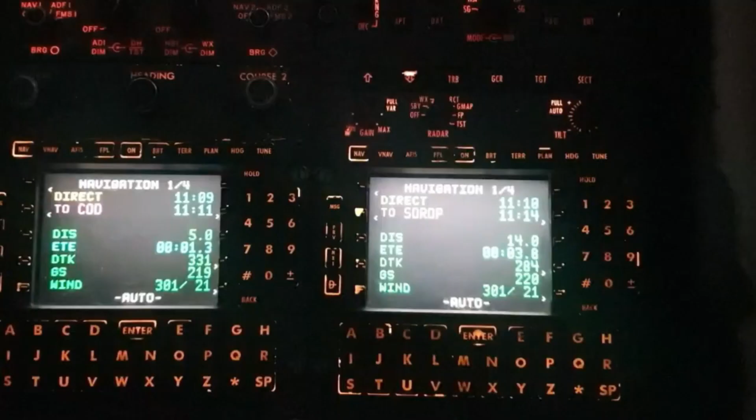But why is the flight technical error the thing that worries me the least? Because the flight technical error, by definition, is something which is always seen by the pilot. You can see the flight technical error in front of you on your navigation display. Just look at the navigation display, just look at your HSI, and you will see that the aircraft is not on the magenta line — the HSI is not centered. If you're on an Airbus, your aircraft is not on the green line. That is the flight technical error: your aircraft not being on the designed path.

Now, the maximum flight technical error which is allowable is half of the RNP, because the remaining half of the RNP is, let's say, dedicated to the technical system itself, and not to the human error of flying the aircraft. But that's perfectly logical, because if you think about a VOR, what we do is allow a maximum of 5 degrees deviation, which is half scale of the HSI. And if we allow half of the RNP, we're actually allowing half scale of the HSI. So what we're doing with the flight technical error is totally reasonable.

Because this flight technical error maximum allowable is 0.5, I want to take advantage straight away: for this reason, it is prohibited to fly direct to the final approach fix on an RNP approach. The reason this is prohibited is because when you reach this point, the final approach fix, the aircraft will be turning.

And then you will find yourself on the final, with an RNP of 0.3 and the maximum deviation of half of the RNP, you could, with the turn, find yourself outside the maximum certified area. So for this reason, they want the flight to be aligned with the final segment before passing the final approach fix, and that's why on an RNP approach you cannot take a direct to the final approach fix.

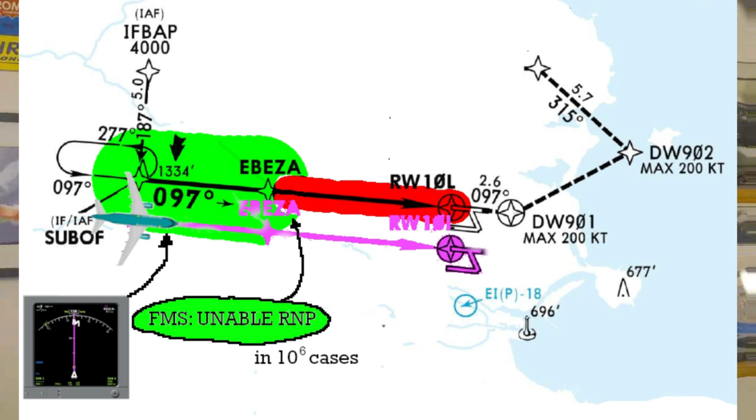As we said in the previous video, there is still a remaining chance that your position is actually farther out, outside the required navigation performance, and the system will not advise you. There is also a statistical possibility of your aircraft not being on the required route and the system advising you. That is a bit more likely, I would say, but this doesn't cause a major problem, because then the pilot is advised and will take a corrective action.

To better understand the navigation system error, let's analyze this example where a pilot is requested to intercept course 285 from Dublin. The course is set and VOR LOC is armed, the aircraft is intercepting with VOR LOC. At this stage, the pilot monitoring sets in the FMS the direct to Dublin course 285. For this reason, the pilot flying will switch to the RNAV.

We must note there is a significant difference between the two navigation modes. The first mode, VOR LOC, was actually tracking the VOR signal and course 285. This signal is less accurate, but the integrity is higher. The second mode, RNAV, corresponds to navigating from the GPS. So you are flying course 285 from a GPS point, which should correspond to Dublin VOR. The error of positioning of this GPS point named Dublin VOR is within the RNP performance.

At some point, we see there is an error introduced in the navigation system. The position of the magenta line suddenly shifts, but the shifting is within the required navigation performance. Therefore, the system does not communicate any error signal. In fact, the aircraft remains positioned within an error of 1 nautical mile, which is the required error in navigation during an SID. Therefore, the pilot is now flying away from radial 285 from the VOR, but this error remains within 1 nautical mile and therefore there is no information given to the pilot.

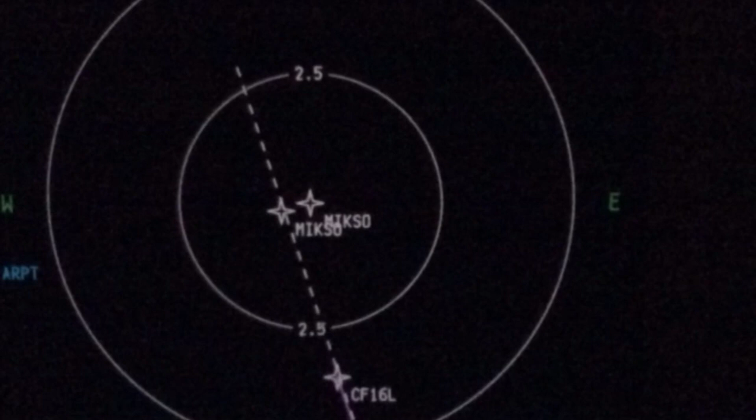So basically MIKSO was not a good intermediate fix, and there was something wrong with that. By searching a bit more in detail, as you can see in this picture, it was found that there were two MIKSO points coded in the FMS, and depending on which procedure was selected, the MIKSO point could be the correct one or the incorrect one. One of those points was actually aligned with the runway, the other point with the same identical name was not aligned with the runway, just off by a few miles.

So this is a subtle error of the system. And of course, eventually, if the engineer goes and checks MIKSO, the coordinates of the points, they will even find that the coordinates are correct, because there is one point with correct coordinates in the system, but there's also one point with incorrect coordinates, and some of the procedures were actually using that point. So the path definition error is an error that cannot be quantified.

Well, we can discuss what are the chances that my navigation system starts giving me an error, or what are the chances that the pilot starts flying the aircraft incorrectly and finds himself more than half of the RNP off course in the procedure. We can't really quantify what are the chances that when a point is miscoded, this point is more than the required navigation performance away from the desired real path.

So the only protection we have for this is, as the PBN manual describes, pilot checking at the moment of the briefing the reasonableness of track and distances of all points.

So it is very important that once a procedure is selected from the FMS - and it's a legal requirement for all RNAV1 and all RNP operations - that the procedure is taken from the database of the system, the database of the GPS or the FMS.

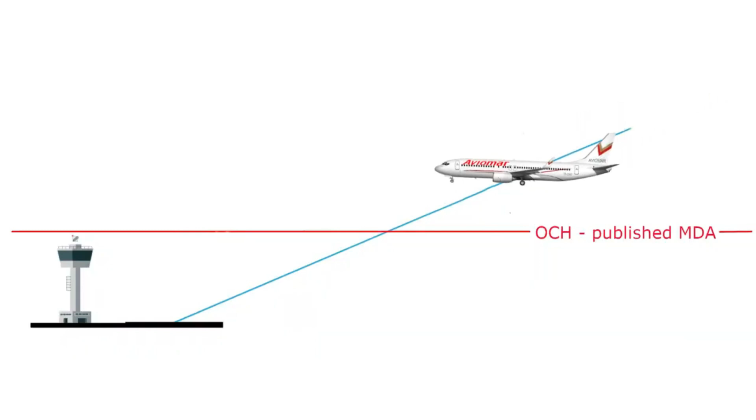But this introduces a second problem: in this case, if the aircraft continues the approach, it will reach the MDA and continue through the MDA as if it were an ILS. Now the problem is that the minima for the ILS already include the reaction time of the pilot to interrupt the approach and start the missed approach.

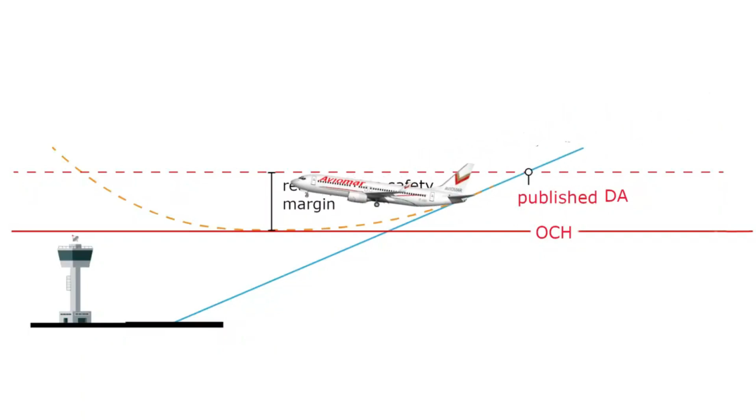Minimum descent altitude, so the minima for a VOR approach, does not include this safety margin, and this safety margin is not clearly stated by the authority. Well, there are some authorities that define a table which is 20 feet for category Alpha, 30 for Bravo, 40 for Charlie, and 50 for Delta. But as a matter of fact, EASA never published any of those values.

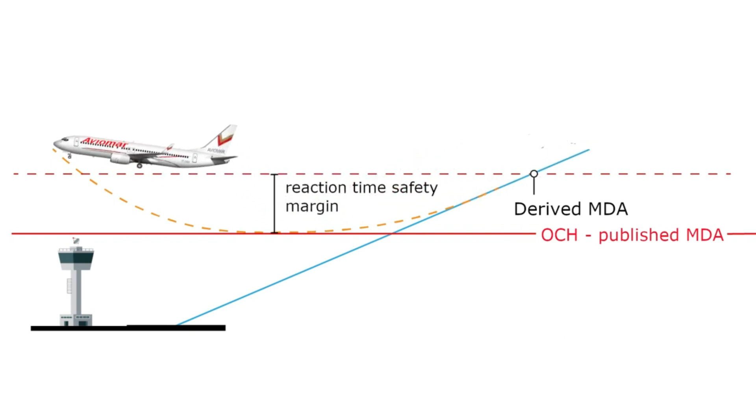Therefore, it is solely at the discretion of the operator to determine the reaction time, or the altitude that corresponds to the pilot's reaction time to initiate the missed approach. The thing is, the MDA in this case has to be revised - what we call the derived MDA - increased to a higher value that includes the pilot's reaction time. So the pilot, when starting the missed approach, will never get below the MDA, because the MDA is never lower than the OCH. If I descend one foot below the MDA, I could actually descend below the obstacle clearance height, the OCH.

Therefore, there will be an add-on value, which in Europe is thought of in two ways: 40 feet in one case, 50 feet in the other. Normally the 50 feet is used by companies that also have wide body aircraft, so they make a uniform value for the whole fleet, while companies that only have category Charlie aircraft will probably use 40 feet. But of course this depends on the company. So be aware that with an MDA, you might need to add 40 or 50 feet to transform it into a derived MDA, which actually corresponds to a decision altitude. This logic applies also for RNP approaches.

The RNP approach introduces a new type of 3D approach. For 3D approaches, we talk about ILS, microwave landing system, and GLS. But two other new types of 3D approaches are LNAV/VNAV and LPV. All these approaches are defined with a decision altitude, because same as the ILS, it's expected the aircraft stays on vertical electronic guidance, and if it doesn't see the runway at minima, from that angle of descent defined by the electronic system, it will interrupt the approach and go around. So the pilot's reaction time is included in the minima for an APV approach with vertical guidance.

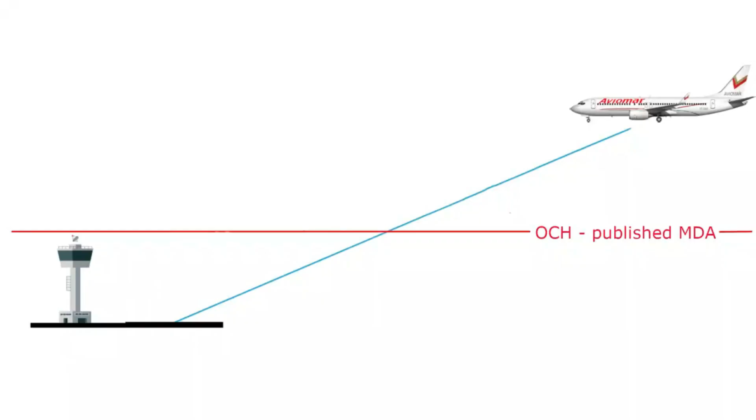Now, if you have a non-precision approach, which is a PBN approach, as it could be an LP approach - localizer performance - or an LNAV-only approach, in this case the minima is published as an MDA. But because in Europe you're required to make a CDFA, the MDA has to be revised into the revised MDA, adding the famous 40 or 50 feet. Bear in mind, if the intention is to level off, because there is a need to level off, like for example on a circling approach, in this case you never have to add 40 or 50 feet, because it's your intention to leave the altitude selected on the autopilot and let the autopilot level off at the minima. So adding 40 or 50 feet is only required when your intention is to continue the CDFA and land out of it.

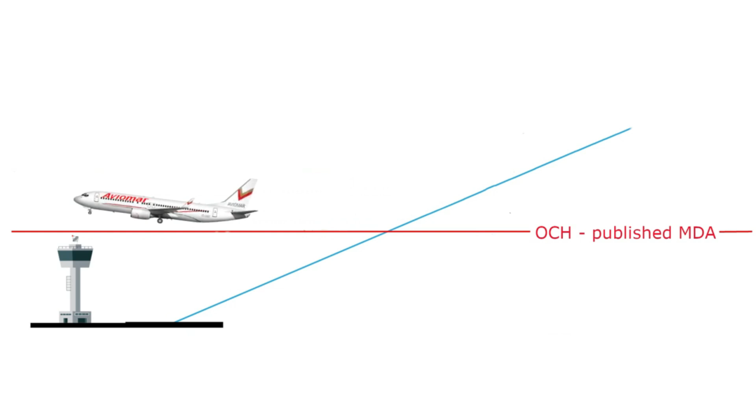I hope this has been clear, because this topic causes a lot of confusion. Actually, if you think about it, it's relatively simple, I would say.

Another thing we have to talk about concerns the change in name. Sometimes it might get a bit more confusing if you take an old chart - there's still some old charts hanging around, and sometimes you might even find an old chart which is still valid. But basically, since 2022, all the charts have been renamed. I'd like to draw your attention to this renaming process, because it really demonstrates that when PBN came out, even those who certified it had a somewhat confused idea.

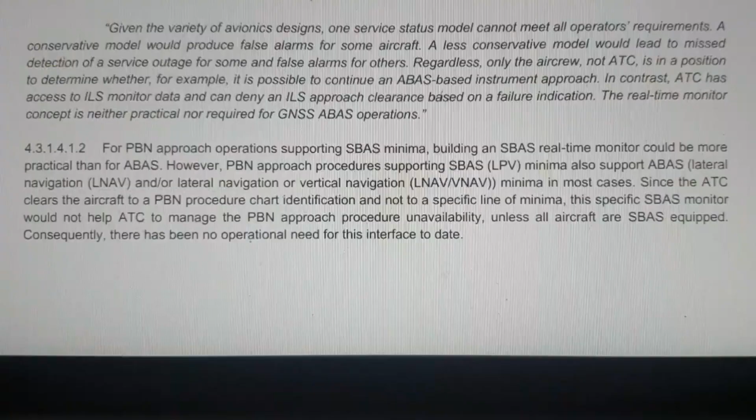In the past, the RNP approach was named RNAV. So if you find a chart written RNAV GNSS, it means that chart is actually an RNP approach. The idea is there - it's an RNAV system augmented by a GPS system, but a normal GPS isn't okay to augment the RNAV system; you have to use an SBAS or GLS for the augmentation system. So that name was technically incorrect, which is why they're changing it. The proper name of an RNP approach is, of course, RNP approach. What this means is that ATC, when clearing you for the procedure, will clear you for the RNP approach.

Because if you have to fly an LNAV approach, or if you have to fly an LPV approach, it's your business. It depends on the certification of your aircraft. The air traffic controller cannot know what is the certification of your aircraft.

Even more, with the RNP approaches, we lifted the air traffic control from the responsibility of monitoring the ground station, or the required station for the approach. The tower controller or approach controller has access to the monitoring systems of the navigation station, so ground-based aids are monitored for functioning, and in case of failure there will be a warning in the control tower, for example telling you we have a fault on the ILS, or we have a VOR that became unserviceable.

So there is a monitoring system that will advise the tower controller that a VOR, an ILS, or a ground station became unserviceable. But the tower controller cannot directly monitor the GPS satellites or any other navigation system you might use, like INS and IRS, to tell you that the RNP approach became unavailable.

Let's take the example of a pilot flying an RNP approach. He has been cleared by the tower, and the tower controller at some point, for some reason, becomes aware that the EGNOS satellite became unavailable. But this pilot is flying an LNAV VNAV approach - he doesn't even have a receiver for EGNOS. So the fact that EGNOS failed is totally irrelevant for this pilot.

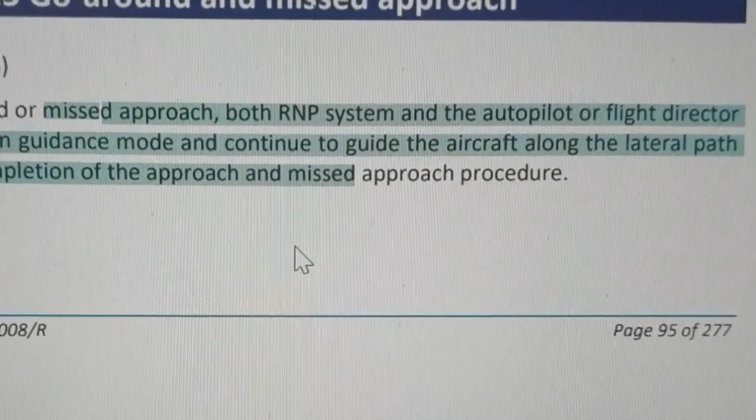The EASA certification specification for the airborne communication, navigation and surveillance actually clarifies that the missed approach has to be RNP. So the autopilot has to be able to follow the lateral navigation produced by the area navigation system during the missed approach. What is interesting again is that EASA itself states among the reasons valid for a missed approach the fact that the aircraft loses the RNP capability.

And of course, the missed approach in RNP cannot be executed. So once again, we come back to the criteria we just discussed before: the captain has to establish a course of action.

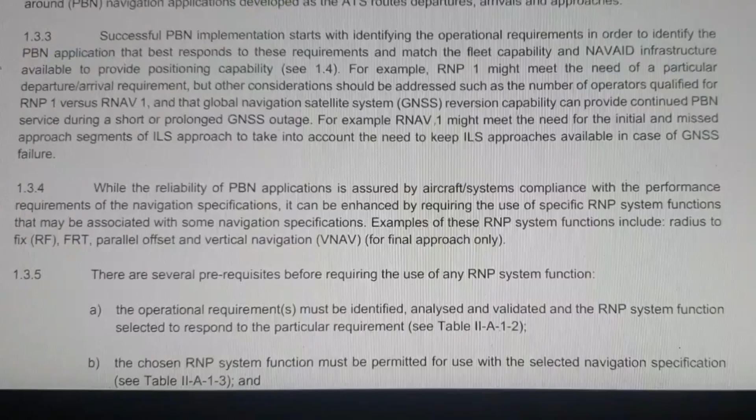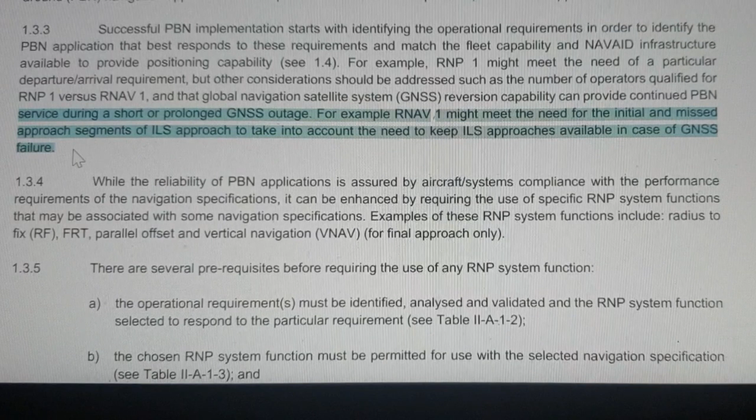The PBN manual of the ICAO is a bit more clear and specific for the RNP approaches. So clearly, it's not strictly prohibited to make an RNP approach which has, for example, an RNAV missed approach. But it's just that the ICAO manual does not take this opportunity into consideration, and even EASA does not. So honestly, I don't know if it would be an acceptable means of compliance for a local authority to make a missed approach in RNAV.

The PBN manual clearly says that the ILS procedure might culminate into an RNAV missed approach, while the RNP approaches are normally RNP missed approach, but they could be based on conventional navigation. So the option of going around using RNAV is not really an option for the RNP approaches. But we will see that the charts published are not always that clear about it.

The fact is that part of the missed approach could still be published as an RNAV procedure. To recap the missed approach, we can say that an RNP approach will have an RNP missed approach unless specifically specified on the chart. Some portions of the missed approach might be RNAV, therefore enabling the aircraft to fly that part of the procedure as an RNAV procedure and not as RNP in case the aircraft has lost RNP capability but is still RNAV able.

The ILSs might have conventional missed approach or might have RNAV missed approach, while the RNP could also have a conventional navigation-based missed approach. In that case, of course, you will not need any RNAV or RNP navigation system serviceable to perform the missed approach.

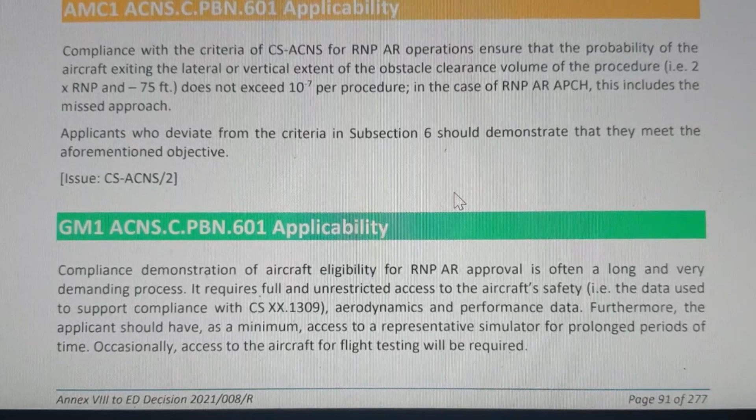It is also worth noticing that EASA defines a separate criteria for the RNP position certification certainty for the RNP AR authorization required missed approach. So there is a specific certification for the RNP AR missed approach which is more stringent than the normal RNP missed approach.

Well, with this we close today's discussion about the certification of the RNP procedures. I would say that today we completed what we started last time. So we discussed what are the RNAV, what are the RNP. We have seen the certification criteria, the augmentation systems available. We have seen how the errors are defined and what is the effect of the different errors.

So the total system error, which as a matter of fact is the sum of the flight technical error that you always see, the path definition error, very important, that you always see but only at the stage of debriefing. So it's very important that you verify on your navigation system that track and miles are consistent. And then the navigation system error that unfortunately is never visible to the pilot, unless you have a message saying 'unable required navigation performance'.

Apart from that, we discussed the change in name charts, we discussed the missed approach procedures for the RNP procedures. In the next video, we're gonna take some examples of RNP approaches just to put in practice what we have discussed here.

Last but not least, I totally agree with those colleagues that say that I'm making things much more complex than what they actually are. I totally agree. The RNP is extremely simple in use, just load the procedure, press the LNAV. But as I said before, I think it's particularly important that the pilot understands what he is doing when he presses LNAV, what kind of procedure he is flying, and what are the certification and legal requirements behind it.